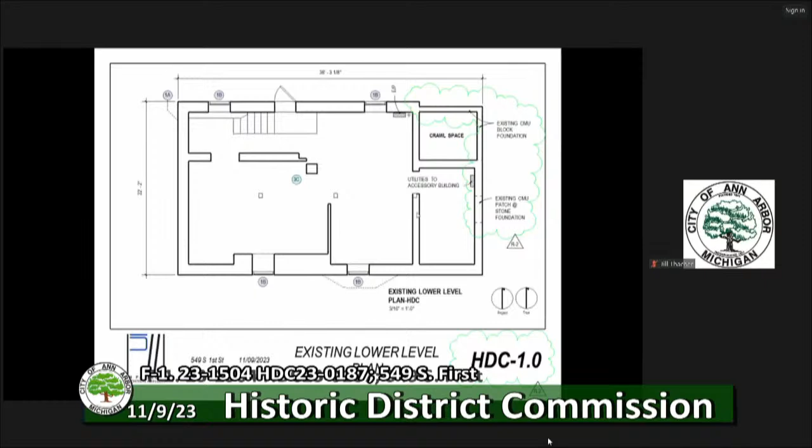This is the lower level. This is the proposed lower level. Here we've got an egress window. Casement egress window, maintaining the width of the opening, which is good, just going down farther. Looks like this is also CMU.

New window where that patch is in the back, which I think is a great idea. And this bit that is CMU now is proposed to be new CMU. Part of the application is to replace, to unbuild the stone basement walls and rebuild them in order to get to the underpinning that's in the basement and remove it and dig the basement down to a 9-foot headroom, and then to rebuild the walls with CMU and replace the stones above grade.

That's part of the biggest work item in this application. The other part is to remove the roof framing that's there now and replace it with scissor trusses. It's hard to see, but it's in our packet. I think you're going to have to look in your packet to get a better view of it, because this is a little bit washed out.

I can probably zoom in on it if you need me to, but it doesn't look great. I'm probably also going to leave that for the architect to explain. But these are revised drawings based on some comments that were made at the review committee, and that clarify what the proposal is, which is appreciated.

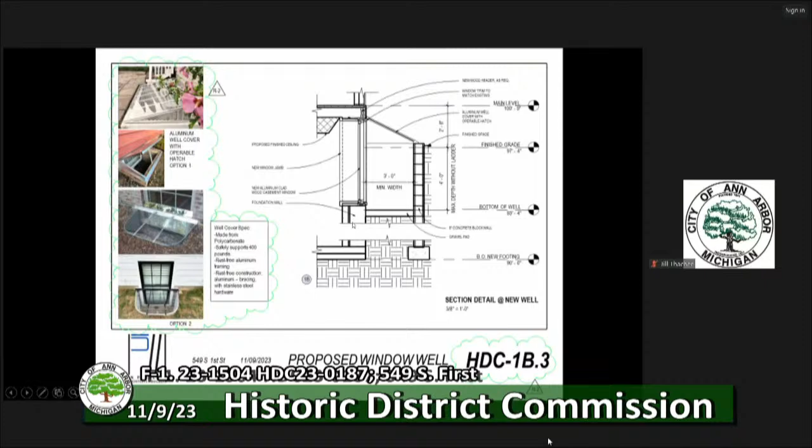Other work on the back of the house includes taking out a couple of those many, many windows, which is fine because it meets all the standards because they're not original. This whole second floor is not original. It's probably from the 70s or 80s, I'm guessing.

Back here, that giant picture window would be shortened, and the trim simplified, boral trim. It would make it a little more proportionate. And the chimney is shown throughout and the drawings are proposed without the chimney. This is a good example of where the chimney would be and how it would be in the way of the floor plans that they've laid out if it were here, and it's also shown in the other floor plans.

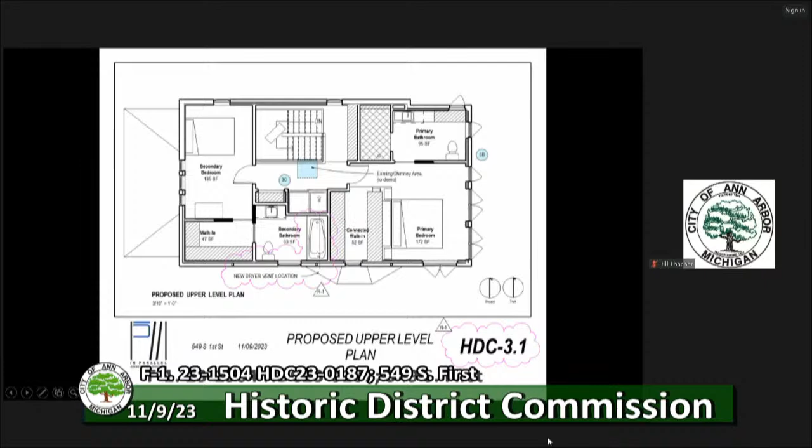I didn't include them all here. There it is on the inside. You can see the framing, and the problems with the framing are explained very well in the application. They don't meet code. A whole lot of stuff on old houses don't meet code, but they are trying to address this.

Here's the area of low headroom where all of those many, many windows are, and the current hip roof would be converted to a rear-facing gable. There are some drawings of the existing and proposed. Here you can see the new gable on the back, a couple of skylights, shortened window.

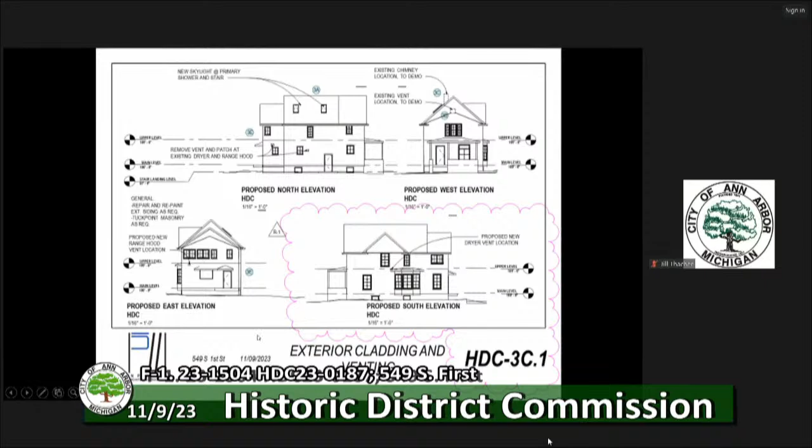The gable doesn't line up perfectly because this corner is at the same wall plane as the two-story wall, and this one, like I showed you, is set in 8 inches, so they start a little bit differently, but I think that's almost unnoticeable. I appreciate that they've tried to match the roof pitch there as best they could, given that situation. Vents are shown on here, which is good—if this project is approved and it comes to me, I won't have to require all of the mechanical permits to have new HDC staff approvals. There's a couple of good pictures of the chimney that I included so we can refer to those if we need to.

And finally, the site plan showing the fences. So here we've got the fence moved forward with a new gate to match the fence, it says.

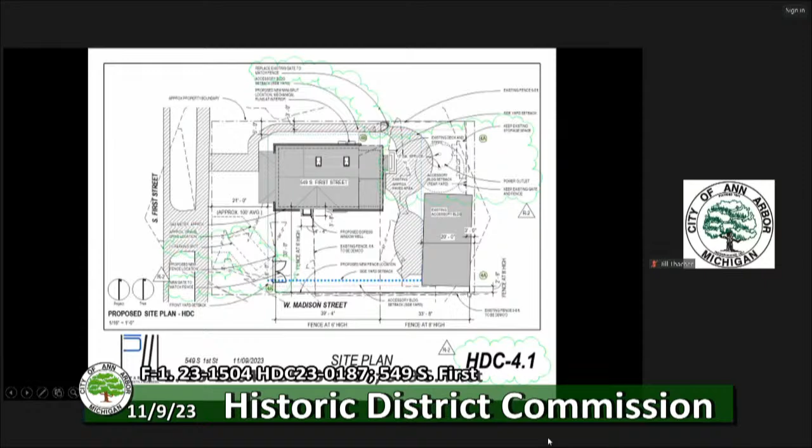I thought I had this figured out beforehand, but here's the 6-foot fence height, and then we've got an 8-foot fence height back here by an accessory building that used to be a barn, connecting with a little bit filled in the corner where there's no fence right now. Keep the existing gate and fence in the back, and this is also existing fence. So it's really this part that would be moved out, this would be infilled, and this back corner would be infilled with new fence.

So, from the Secretary of the Interior standards that best apply: number 1 says a property will be used as it was historically, or be given a new use that requires minimal change to its distinctive materials, features, spaces, and spatial relationships. Number 2 says the historic character of a property shall be retained and preserved. Removal of historic materials or alteration of features and spaces that characterize a property shall be avoided.

Number 9 says new additions, exterior alterations, or related new construction shall not destroy historic materials that characterize the property. The new work shall be differentiated from the old and shall be compatible with the massing, size, scale, and architectural features to protect the historic integrity of the property and its environment. Number 10 says new additions and adjacent or related new construction will be undertaken in such a manner that if removed in the future, the essential form and integrity of the historic property will be unimpaired.

I selected some guidelines from the Secretary of the Interior and from Ann Arbor. There are many, many more that could be applied here, but I just went for the most obvious ones. Guidelines for new construction.

It's appropriate to design new features so they are compatible with the historic character of the site, district, and neighborhood. It's not recommended to introduce new construction on the building site which is visually incompatible in terms of size, scale, design, materials, color, and texture, or which destroys historic relationships on the site.

From the guidelines for roofs, it's recommended to retain and preserve roofs and their functional decorative features that are important in defining the overall historic character of the building. This includes the roof's shape, decorative features such as chimneys, and roofing material. From the Ann Arbor Historic District Design Guidelines for roofs, it's appropriate to retain and maintain original historic roofing materials, roof shape, dormers, cupolas, chimneys, and built-in or decorative gutters and downspouts.

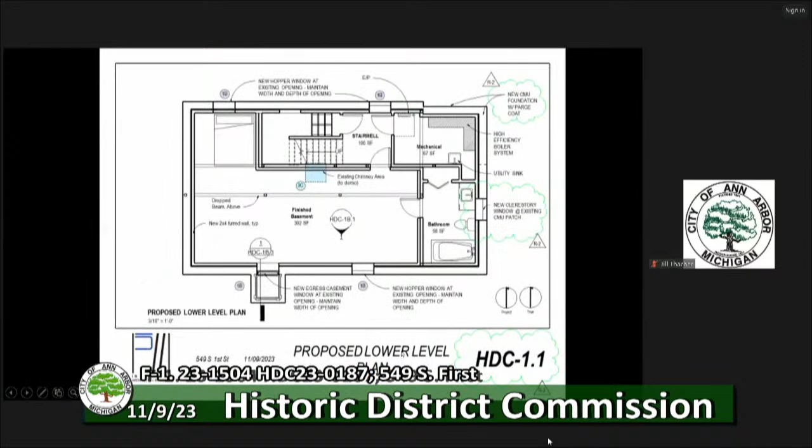Okay, I'm going to go back up here to the drawing set, and I'm going to see if I missed anything from the staff comments. The main roof structure is 2x4 rafters that are 24 inches on center.

The sill height of the egress window would be lowered so that it's 5 feet 5 inches tall instead of 1 foot 11.

Staff has concerns about disassembling and reassembling the foundation wall, whether the new appearance will match. Staff also has concerns about the chimney removal, since that's generally not considered appropriate under both the Secretary of the Interior's guidelines and the Ann Arbor Historic District Design Guidelines. But I think I hit all of my other comments, so that's it for me.

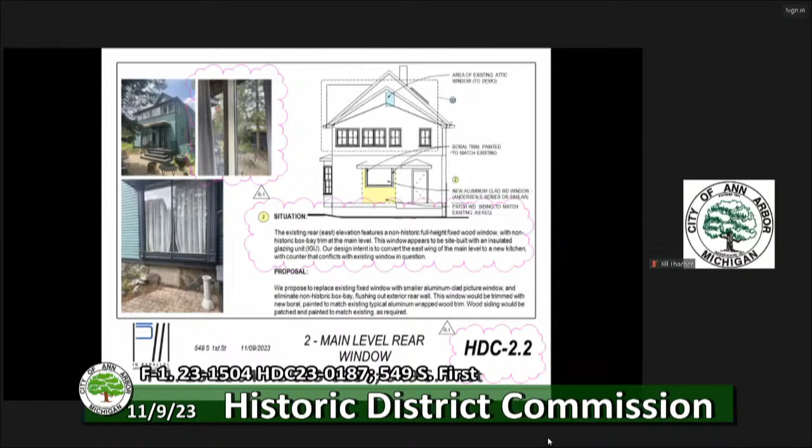Sure, actually don't have a whole lot more to add. The staff report was pretty thorough and the application well organized, which is much appreciated. But just to mention that there was quite a bit of discussion walking around the property about the stone foundation walls, and we talked about possible methods of how that would be documented and then reconstructed. So if there's any questions about that later, we can talk about that.

Also, the new roof framing, it seems like our concerns were addressed by the updated drawings, but concerns about how the heads of the windows would be treated, or potentially impacted or not.

About the chimney, as we could see in the photographs, it's not a very ornate feature, but it is a character-defining feature of the property. A lot of the neighboring homes have a very similar feature, so it's of the setting and the district, I'd say. And that's all I have in my notes here.

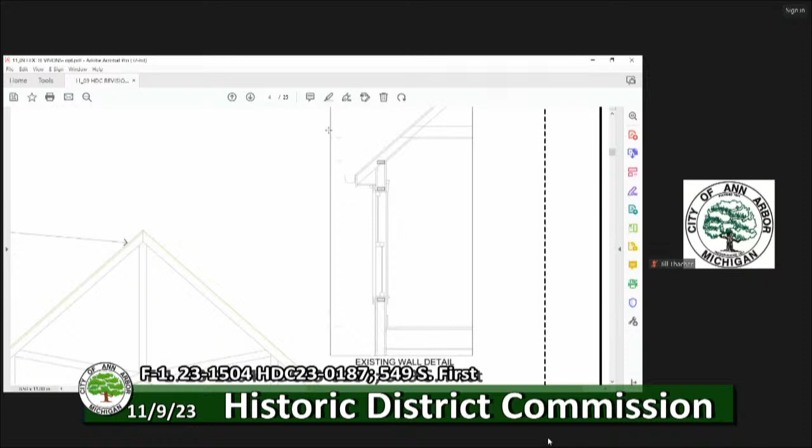So our intention is to rebuild everything on the outside just as it is in terms of its location and proportion, using as much of the salvage material as we can. The way we're proposing to do that is to very carefully take down, at the very least, the fascia board, the soffit, the piece of trim which is presumably helping to hold the soffit up, and the frieze board. Of course, if we get into it and we don't have to take something off, we wouldn't. But at a minimum, that's what we'd be planning to remove, carefully store away, and save for reinstallation.

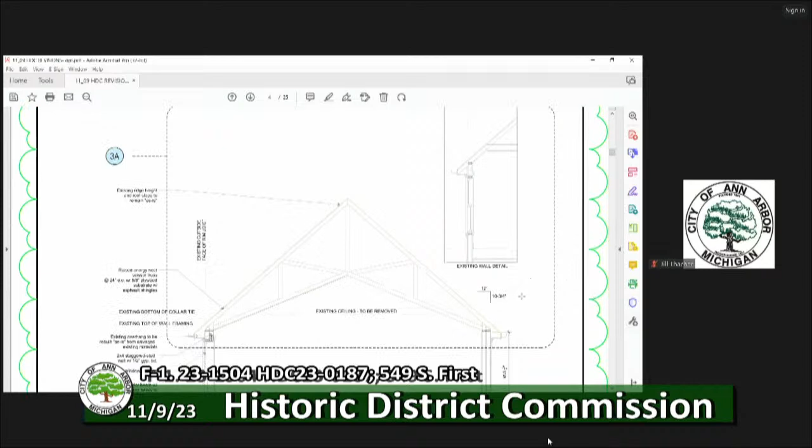And then the rafters themselves would be removed along with the collar ties, which you can see at the top of that section, which form the ceiling. And then if we could, zoom in on the proposed section in that same location? Yes, there you can see.

Okay, so I want to point out, we did very faintly indicate the existing top plate, which is just above the kind of two dark top plates at the top of the wall. Is everybody able to see that? So that's where the existing top plate is. So we are proposing to lower that top plate approximately 4 inches to gain enough space for what's called an energy heel on the truss.

That will just allow for a little more insulation in that part of the house, and still leaves room for a window header if we need it without changing the window. And then the tail of that new truss would extend out just like the rafter does now as a 2x4, basically giving us the same geometry that's there now. So it's just a matter of putting everything back just like it was.

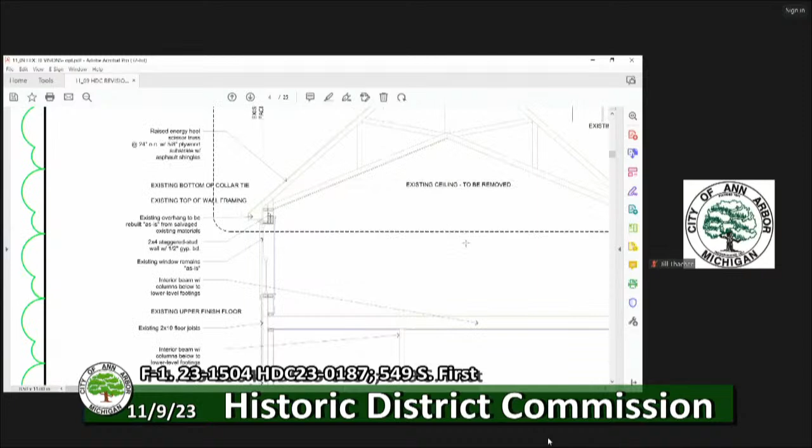So it shouldn't be too complicated. Geometrically, it's all trying to be what was there now, but the structure of the truss allows us to open up the floor plan for the upper level and provide more ceiling height without having a really intense network of columns and beams coming down through the house. We did design this without the trusses, trying to preserve the existing framing, and it just got to be quite the network of columns and beams, really starting to negatively influence the spaces below. So that's kind of how we got to this idea of the truss.

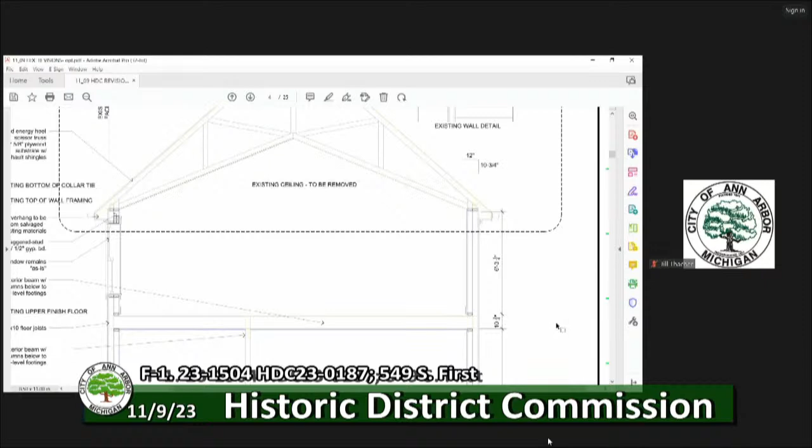So hopefully I've answered your questions, but please, what questions are there? Same sort of question, but can you specifically say what's going on with the front facade? There's an overhang with the soffit, there's a rake board, and then there's the returns, there's fascia board.

So all of those things are character-defining features of the house. Are all of those coming off and being put back on, or are the returns staying, or the overhang staying, or are you rebuilding the overhang? That's a good question. Certainly our intent is, if they do come off, to put them back exactly as they are. But to be honest, I haven't fully thought through the sequencing of that.

I could imagine a version where that wall is somehow braced during the truss installation, and we don't use a gable end truss, or maybe we sister a gable end truss onto it. That seems like best case scenario. So that's for the street facing facade, and I think that would be our intention. But I admittedly need to look into that a little further structurally.

Okay, so on the rear facing side, which I know doesn't matter quite as much, that's a different situation because we'll have a new dormer, new gable end right up against it. So maybe it's not as critical on that face to do something like that.